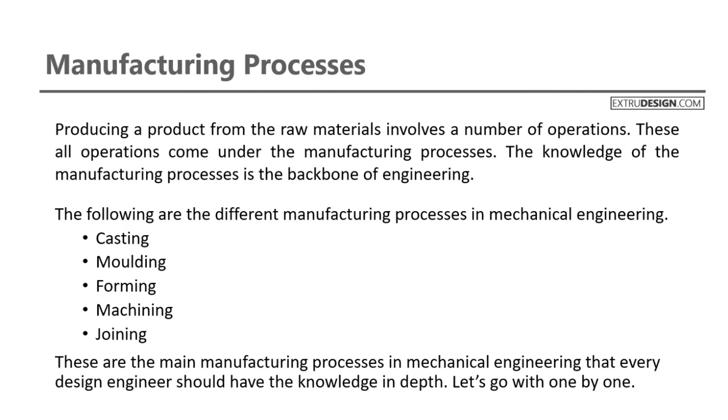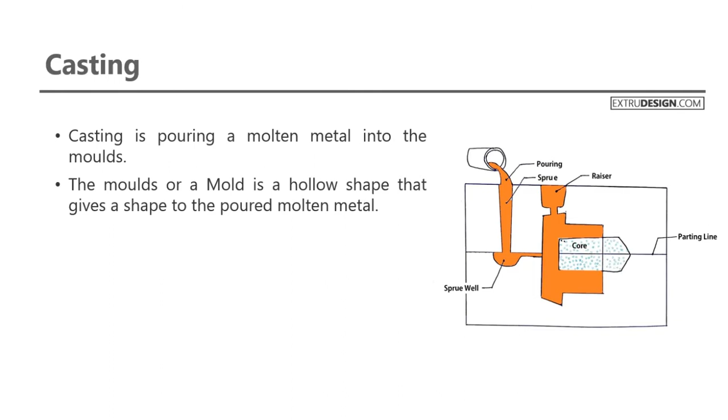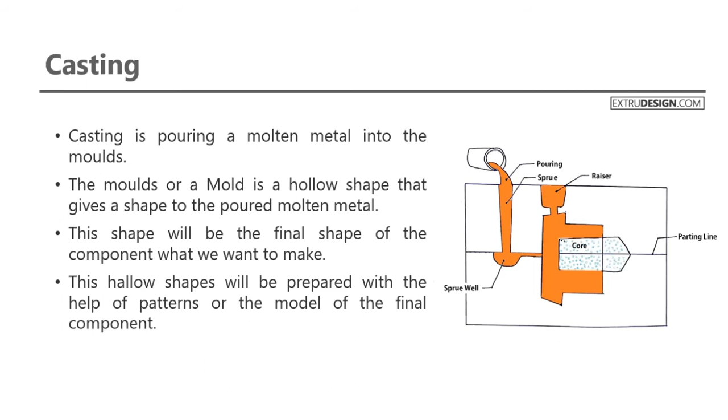First one is casting. Casting is nothing but pouring molten metal into molds. A mold is a hollow shape that gives shape to the poured molten metal, and this shape will be the final shape of the component we want to make. These hollow shapes are prepared with the help of patterns, or models, of the final component.

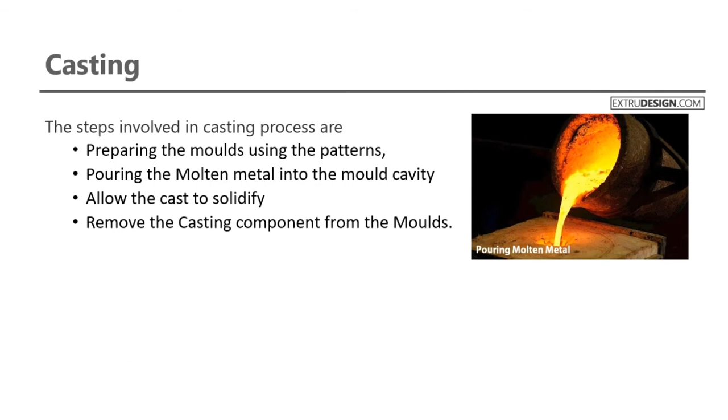The different steps involved in casting are: preparing the molds using patterns, pouring the molten metal into the mold cavity, allowing the cast to solidify, and removing the casting component from the molds. This is how casting components are prepared. For example, crankshafts, connecting rods, engine blocks, and gearbox housings are prepared from casting.

There are different casting types available: sand casting, permanent mold casting, and die casting. Sand casting is where the molds are prepared with sand, whereas permanent mold casting uses metallic molds, and die casting forces the molten metal into molds with heavy pressure. This is all about casting.

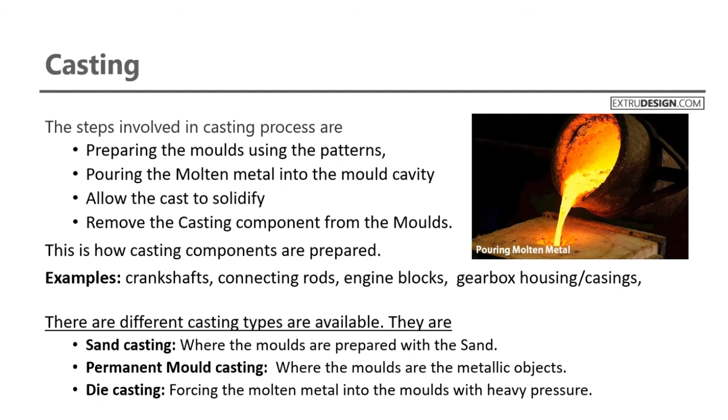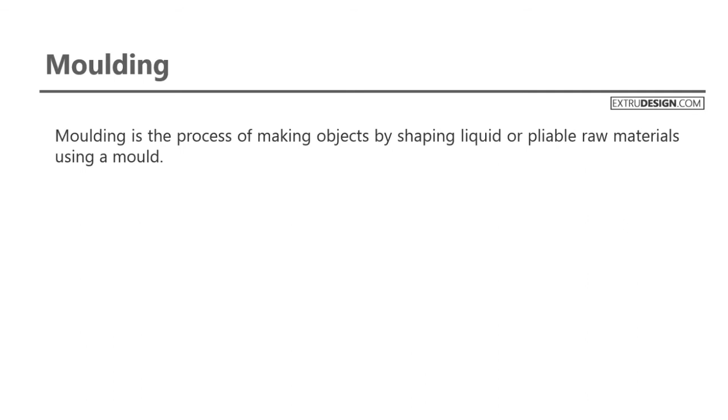The next one is molding. Molding is the process of making objects by shaping liquid or pliable raw material using a mold. Something similar to casting, right? But really, they are not the same. Molding is the manufacturing process for non-metallic objects when further machining is not required, but casting refers to metallic objects where further machining is required. This is the main difference between casting and molding.

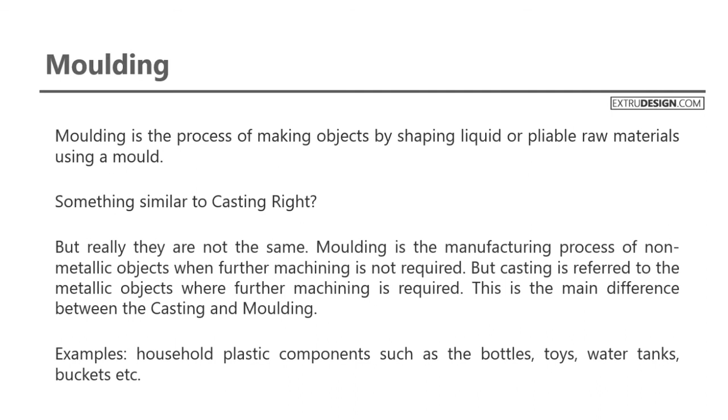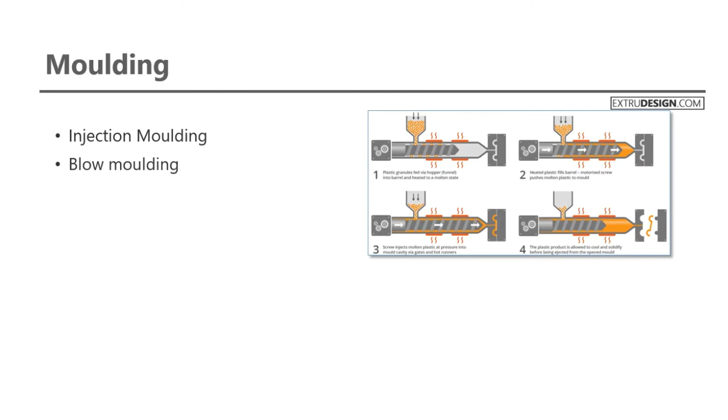Examples of molding are household plastic components such as bottles, toys, water tanks, and buckets. These components are all made from molding. There are different molding methods available: injection molding, blow molding, compression molding, and rotational molding. These are the four different molding methods.

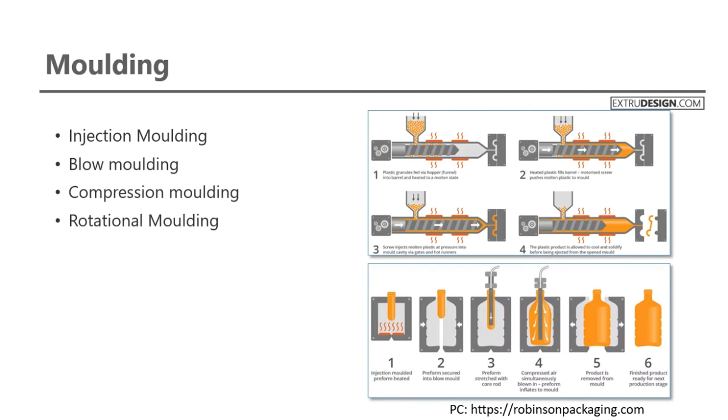And the next one is forming. In this forming process, metallic objects are subjected to heavy loads for permanent deformation without adding or removing material. This forming process operates on the plastic deformation of material, hence the objects are permanently deformed.

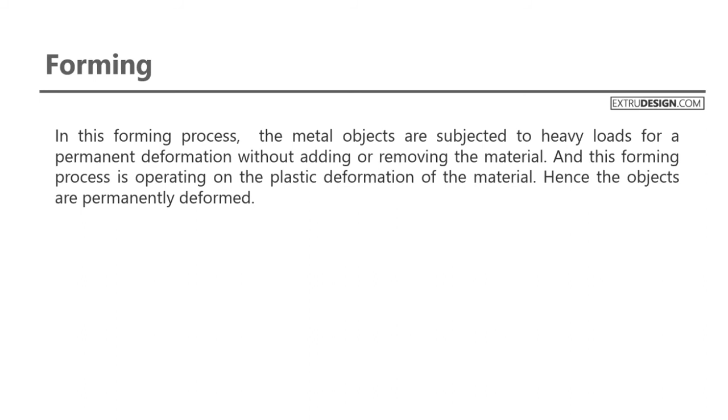Examples are components that need further machining and some that don't, like wires and tubes made by extrusion forming processes. The forming process has different categories based on applied loads: compressive forming, tensile forming, and bending and shearing. These are the different forming processes.

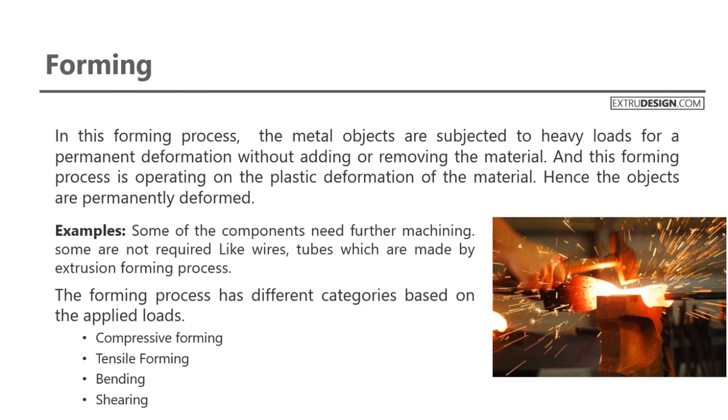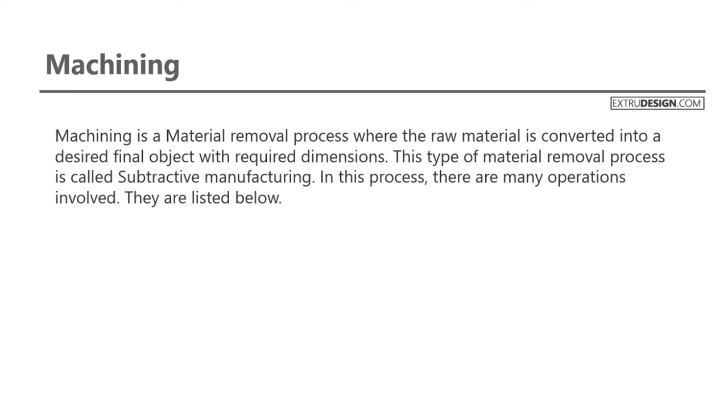And the next one is machining. Machining is a material removal process where raw material is converted into the desired final object with required dimensions. This type of material removal process is called subtractive manufacturing. In this process, there are many operations involved, some of them listed below: turning, milling, and drilling.

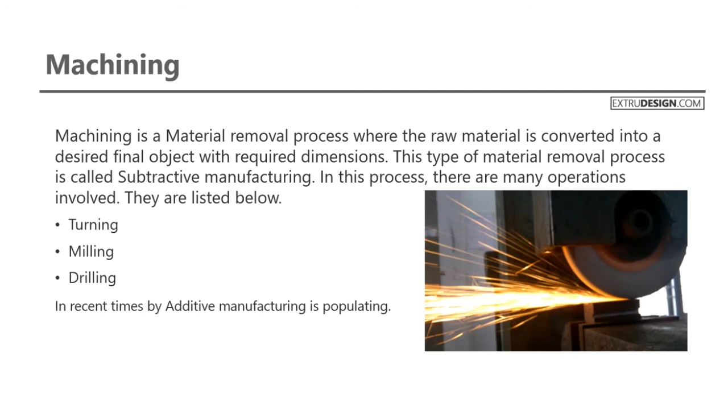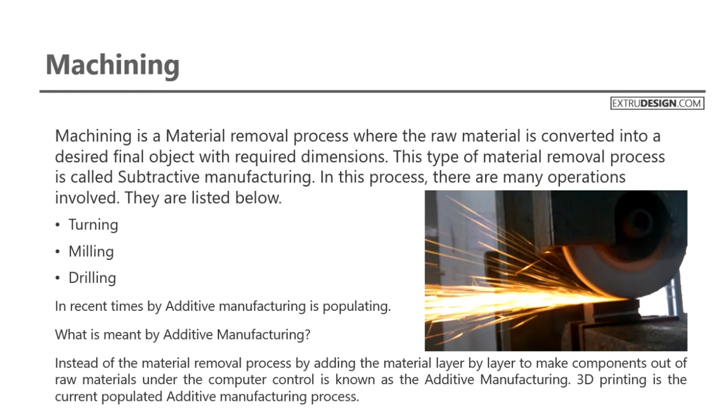In recent times, additive manufacturing is becoming popular. So do you know what additive manufacturing is? Instead of a material removal process, adding material layer by layer to make components out of raw material under computer control is known as additive manufacturing. 3D printing is the currently popular additive manufacturing process. This is a little bit about machining, and the next one is joining.

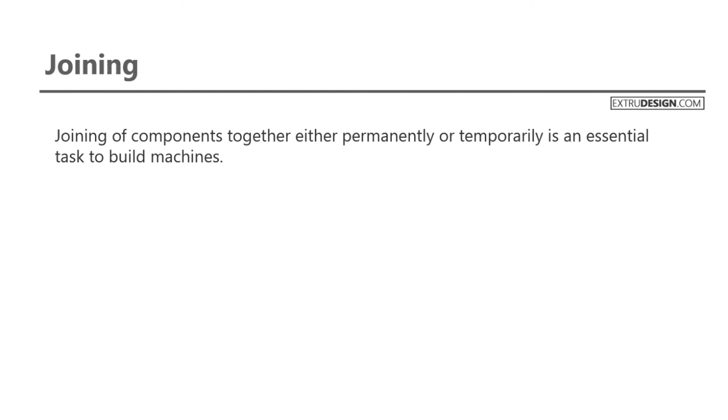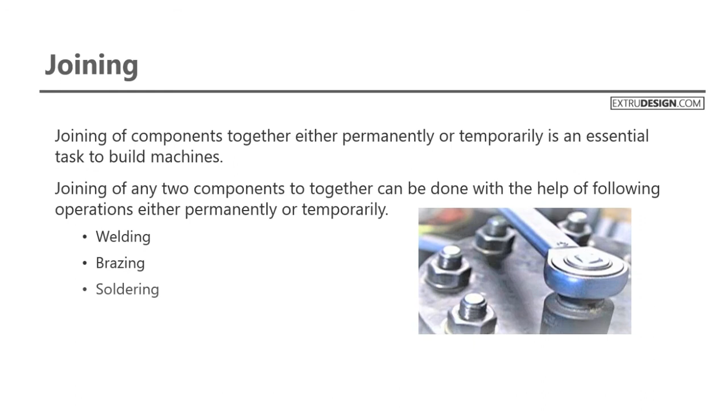Joining of components together, either permanently or temporarily, is an essential task to build machines. This can be done with the help of the following operations: welding, brazing, soldering, adhesive bonding, and fastening. Welding, brazing, soldering, and adhesive bonding are permanent joining methods, whereas fastening is a temporary joining method. These are the different manufacturing processes.